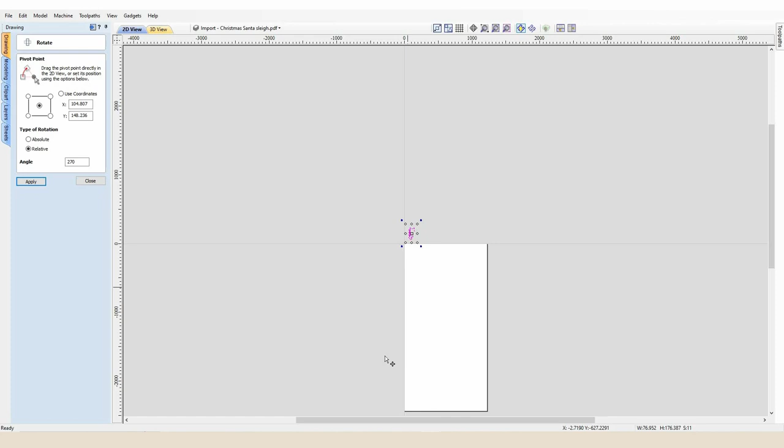So we're going to take this file. The first thing I'm going to do is reorientate it and turn it 270 degrees, so it sits nice and straight across our 8 by 4 stock. I'm going to center this to the stock very quickly, and I'm going to change the size.

If you look over here, you've got select object size. Across this y-axis, I'm going to make this 2,400 millimeters. Because I've got the X and Y linked using this button here, it's already calculated our x-axis at 1,050 millimeters thereabouts, so that's fitting nicely on our sheet now, and it's also centered this design to our sheet.

Now, what I'm going to do first is take this outside vector and hold control on my keypad, press C, followed by pressing V. That's copied and pasted an exact carbon copy of that vector right over the top of our design.

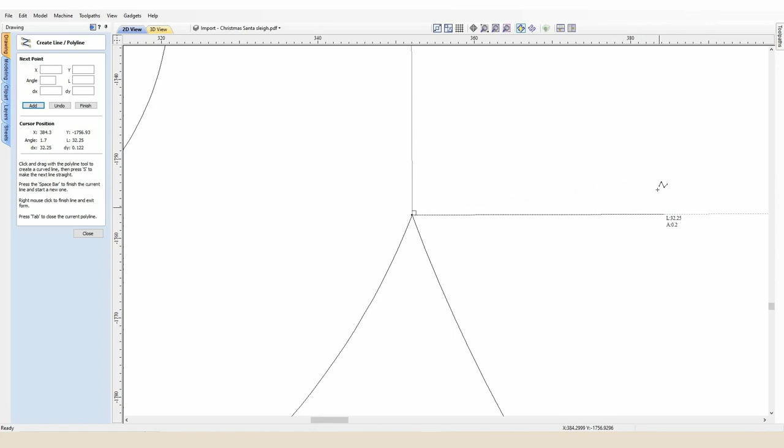So I'm going to come over to the drawing buttons and draw a straight line. This symbol here shows me that my new line is going to be directly touching the edge of this vector. As I come down to here, I'll hover over this one to get that same icon to show. Now straight away, the drawing icon is going to try and ask me to draw another line, but if I just press the space bar, it stops that.

So now I've got two sleigh outlines and this separate line in there. If I click one of these outline vectors and click our new line, I'm going to move these away from the main design just so I can work on it without disturbing anything.

So very simply, I'm going to take my smart snipping scissors and cut that away. What you've got now is the remainder of this boundary, which is going to sit over the top of our design as an overlay piece.

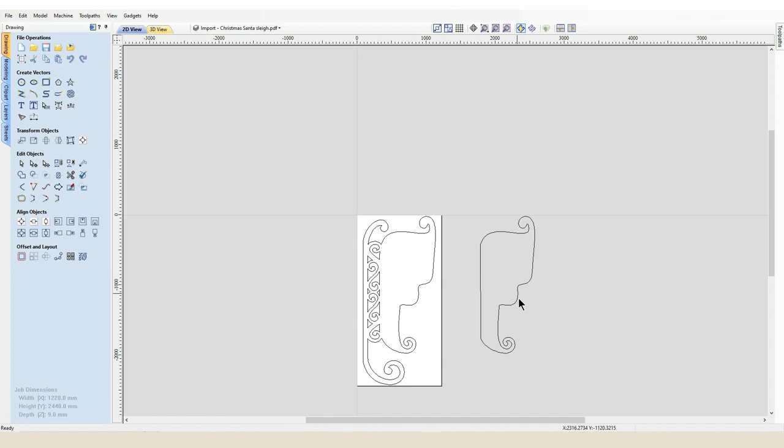So now I've got my separate boundary here. I'm just going to highlight that one and come over to the offset boundaries function, and I want to create a new vector inside. I'm also going to leave it so it creates some sharp offset corners, and I'll come in by 50 millimeters. When I press that, you'll notice it's popped us a new vector inside here.

So I'm going to take this one away, I'm going to delete that. And what I'm left with here is this inside boundary and this outside boundary.

So for point of reference, if I just highlight both of those vectors and press G on the keypad, I can drag those and drop those straight over the top of our design, and it will show you what space we've got to work with then. So that's going to be our overlay piece that's laminated on top of our design.

Right, okay, so I've been online and found a license-free image of Santa's face, which I quite like the look of. This is going to VCarve really nicely.

So quite simply, we've got ourselves a bitmap image that we brought into VCarve Pro, and I'm going to select the trace bitmap option. At the moment, I'm quite happy to just knock off the tightness a little bit, and we'll leave the noise filter very low because if you look at this, it's a fairly clean image.

So if I just press the preview button, you can see now our new created boundaries are linked quite nicely to the original bitmap. So we'll just press apply, and then we can come up to our layers here and switch off the bitmap layer.

And that's now just hidden the bitmap away in the background, which we can always bring back again. But for the time being, we'll just switch that off. So now what we've got is our Santa face vector, okay?

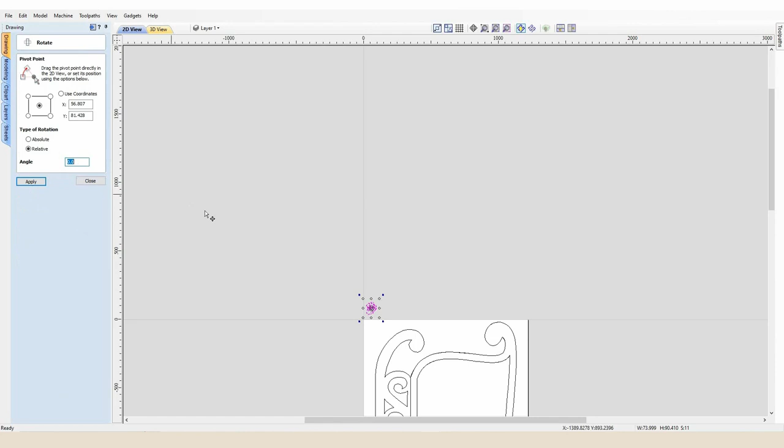So we'll close off the bitmap trace and we'll go back to our drawing tools because again, we're gonna mess around with this ever so slightly. So we're gonna try and change Santa by 90-degree increments so he sits quite nicely on our sleigh.

And if I bring Santa across to here, we'll notice first things first, he's not sized very well. So we will try something in the region of about 400 millimeters. And that's a much nicer size model now for our project.

However, as you can see, poor Santa's facing the wrong way. So we'll just flip him vertically now, which means he'll be facing the right way on our sleigh.

Now the next thing is we're going to add some text down here to ask Santa to kindly stop here. So I'll deselect Santa's face and we'll come over here to the draw text function. We're going to use an Arial narrow text and all in capitals. Santa, enter. It'd be Santa, stop here, okay? Okay, so now we've got the basis of our text made.

Just notice that these letters are quite close together. So to give them some definition, we're going to come over to the Edit Text Spacing and Curves function. And we're going to select our text. By holding down the Shift key, we're going to click twice between each letter. And that just opens up each of the text just a fraction.

Okay, so we'll get that spaced just how we want it. I'll press Escape then, which will get us out of that text spacing function. And again, I'm going to highlight all of this text here now, and I'm going to rotate that by 270 degrees, which will again bring us nice and close then to the orientation of our project.

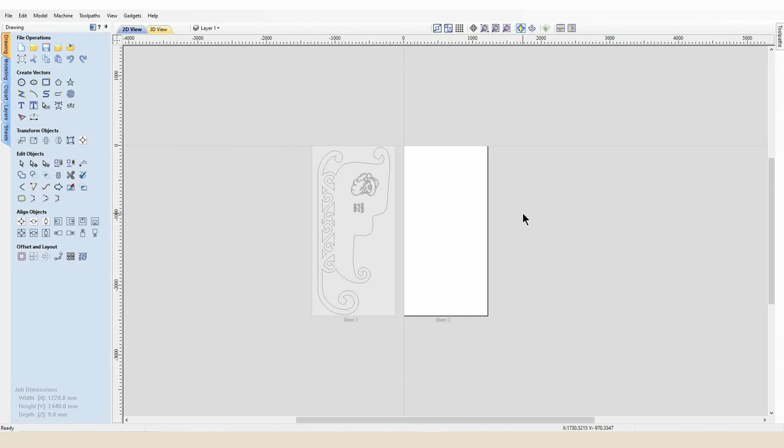So at this stage, I'm going to open up the Sheets function and I'm going to add a new sheet. I'm going to take these selected vectors, hold Control and press X, which is going to cut those away from our surface. I'm going to come over to our second sheet and hold Control and press V then to paste this onto our second sheet.

So we'll just move this around now so it's orientated a bit better on our second sheet, which will set up all the cuts for that. We'll just come back to our first sheet now. And we're going to open up the toolpaths functions and we're just going to have a look at creating now these toolpaths, okay?

So the first toolpath I'd like to create is going to be a profile cut, and we're going to profile cut that on the inside. By coming down to our shapes, we're going to hold down the left mouse button and drag up and to the left hand side just to select all of those vectors.

We're going to cut this with a 3.175 or a 1/8 inch compression cutter. Starting from the top, we're going to cut this 10 millimeters deep, which will allow us to cut with our compression cutter in one pass. We're going to cut on the inside of our shape.

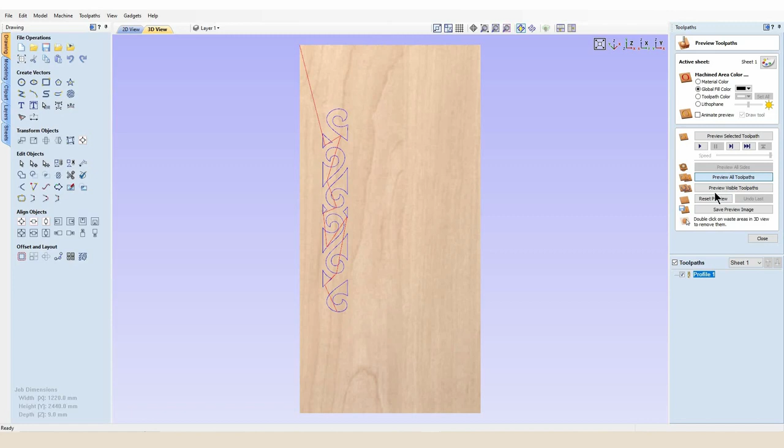And because we're using a compression cutter, we're not going to use any tabs for that. And we don't need any ramps. We're literally going to press calculate. And it will obviously tell us that by cutting 10 millimeters, we'll be 1 millimeter into our spoilboard, which is okay. So if I reset the preview, I'll just ask it to cut our previews then. You can see by double clicking on each of those components, that's going to disappear away from our material.

Okay, so we'll come back now to our 2D view. We'll deselect this one, select our outside vector, and our second toolpath is going to be cutting on the outside using exactly the same cutter and exactly the same functions. We'll press calculate, and again this is going to promote this onto our preview for our stock.

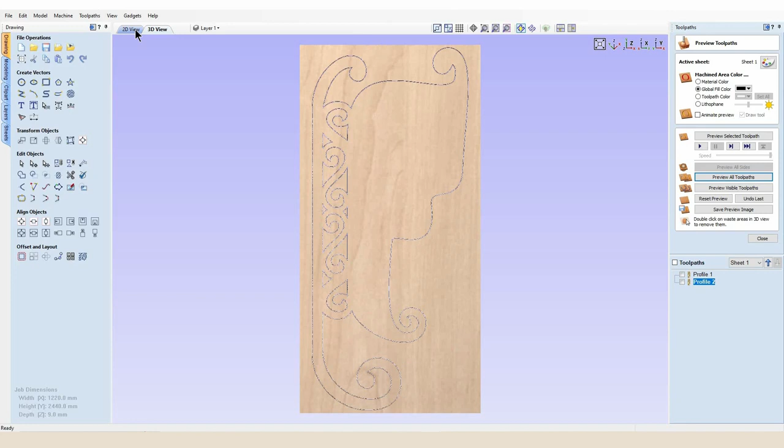Okay, and then what we're going to do is come in here and set up a VCarve toolpath. We're going to highlight all of our vectors for our VCarve, and we're going to use a 4mm end mill, it's a good quality cutter, cutting 2 millimeters deep into our stock. Then our finishing pass is going to be a 60-degree VCarve cutter. So I'm quite happy with all the parameters selected.

So if we run the preview now, you can see we're going to have all of our internals, so I could just cut those away from the project. Okay, and then if I just double click on this outside, you can see then that is our project in the flesh. So that's sheet 1 done.

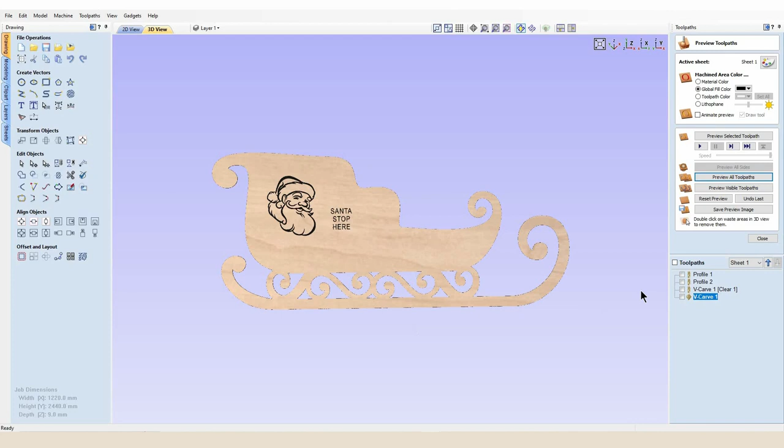There's our text for Santa Stop Here, there's our VCarve for the Santa face as well, and then there's our internal and external profile cuts. So if we come over to the summary of toolpaths, that's going to tell us we're somewhere in the region of about an hour now to cut the first sheet.

Okay, so that's all of our toolpaths created for the first sheet. So very quickly and very briefly, we're going to come over to this second sheet. Now they're grouped - if we press U on the keypad, that will ungroup all of those vectors again.

Okay, so to group multiple vectors, you press G on your keypad for grouping. And then to ungroup those vectors again, you highlight them all and press U, and that will give you separate vectors back again.

Okay, so to go back to this, we're going to select our internal vector, and we're going to come over to our profile toolpath, and we're going to cut inside of the line, again using our 3.175mm end mill at 10 millimeters deep. And if I press calculate, that will very quickly show us this internal cut.

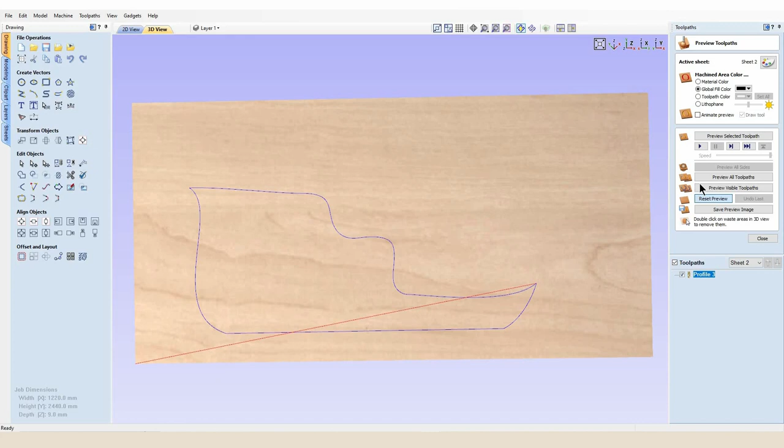Okay, then come back, we'll select the outside vector, and we'll create another new toolpath for cutting on the outside only. We'll press calculate, and as you can see, that will be our inside and our outside vectors cut.

I'm going to go ahead now and start saving these toolpaths. So the only real thing to be aware of, if I come back to the first sheet, when I come to saving my toolpaths, I'm going to use this option here, which is visible toolpaths to one file. And to cut down on machining and setup time, I'm going to select our first profile, which is these internal cuts, and our second toolpath, which is the external cuts.

And you can see there we've got profile 1 and profile 2 in the toolpaths to be saved. I can select as many as I need to, but you have to be aware that all of those have to be the same cutter. So the second I go and select something which is a different cutter, it comes up with an error, and obviously it takes away my function to be able to save my toolpath.

So just double checking, I've got profile 1 and profile 2. I can go ahead - post-processor then is obviously my Yeti SmartBench. And I can go ahead and press save toolpath and save that off to my folder before using Smart Transfer to pop that file across to the SmartBench.